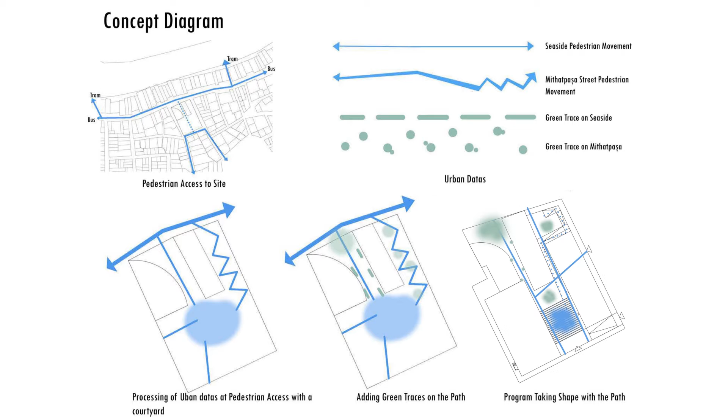Then I followed the green traces. I tried to apply them to sites with the main pedestrian axis and the side axis. First of all, I determined my pedestrian entrances and divided the functions into certain zones, according to the movement in the site.

I combined them with the green spaces. Then I added the program. Here exploded diagram, bubble diagram, and the matrix diagram are seen.

I tried to create a commercial axis on the Anadolu apartment side of the ground floor. Here I added functions such as cafe, restaurant, gift shop, etc. I left the middle part completely empty and tried to design shady semi-open spaces where people could spend time. The upper floor of this area can be reached by a ramp from Mithatpaşa Street.

I wanted this part to work like an axis and a backyard that will be in continuous use. I reserved the other side for my theater building and combined my two masses with this semi-open space. I integrate the semi-open space on the ground floor into the theater with the wall system that can be opened.

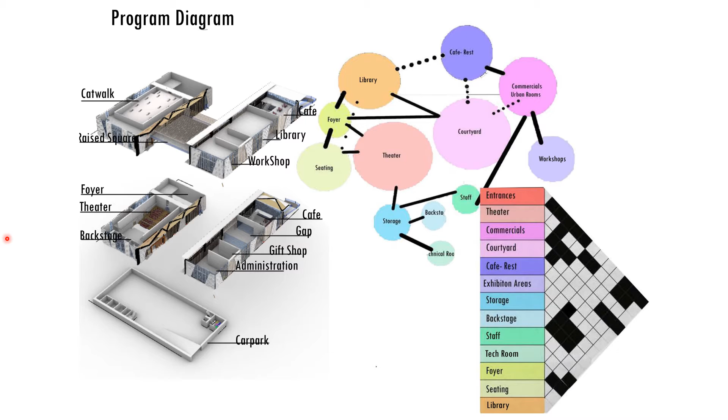The axis from the Goethe building and Anadolu apartment building is a linear axis. At the end of the side, a square is formed by green traces, and with these traces it reached the courtyard I mentioned before.

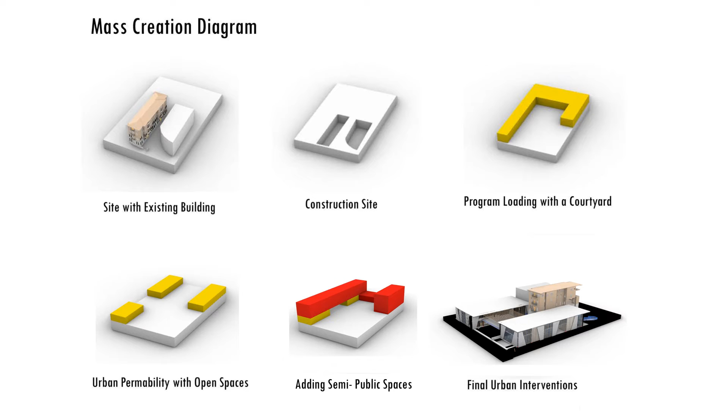Here is my mass diagram. We see the process of the program together with the urban spaces and the final state it has taken. Here too there are site plans and sections.

When we come to the ground floor plan, the theater position is like this. By entering the foyer from here, we can reach the +2 level with these stairs. And the seating areas at the 0 level, thanks to this hall.

Here the stage, and right after it's located the backstage. In the backstage there are staff rooms, a dressing room for men and women, and a storage.

The transformable part of the theater consists of accordion doors. Thanks to the accordion doors located next to the stage, the direction can be turned to the inner courtyard. In this way, outdoor activities can also be carried out. Its renders can be seen here.

In the other block, there is a cafe, restaurant, gift shop, and an administrative unit. Displays serve more daily use. The ramp in front of the cafe takes us to the plus 5 level.

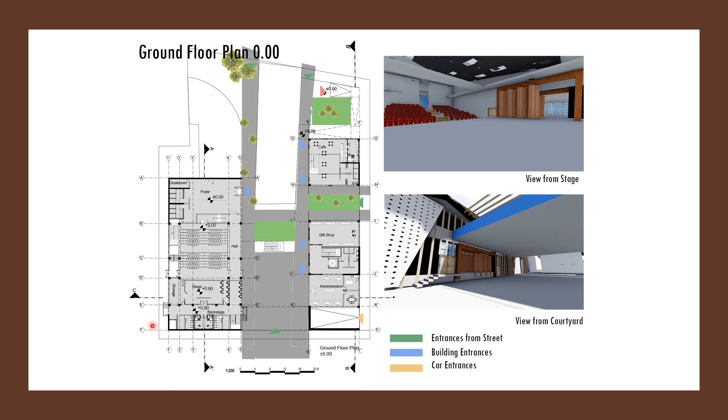Thanks to this platform, we have semi-open areas in the courtyard. Two main gaps allow people to gather in this courtyard, spend time here, and keep this place alive.

When we go to the next floor, we come across functions such as a technical room, a catwalk, a storage, a machine room in the theater section. On the other side, there are cafe, library, and workshop areas.

The platform coming from Mithatpaşa Street forms a raised square in the middle. Units at the plus 5 level can reach here directly. It is envisaged that various exhibitions will take place here, and that people will use it in daily life.

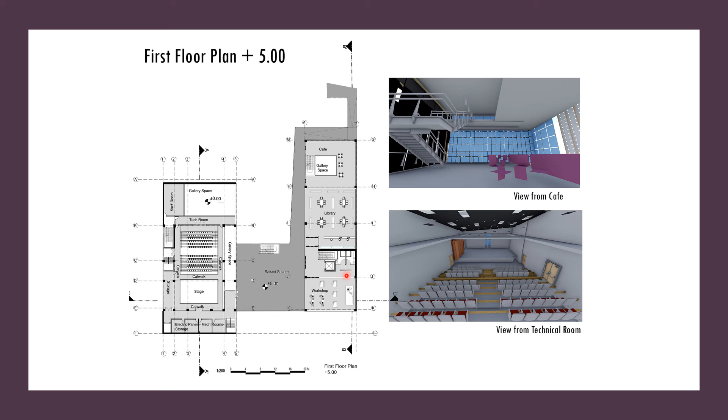The library and the workshop were created for the use of children in the surrounding schools. It tries to be a complex, not only for the theater audience, but mostly fed by its neighbors.

The basement floor is reserved for car parking. Here too functions such as mechanical room, storage, and electric panels are located.

These are sections. Section A passes through the middle of the theater. Here you can see the foyer, the seating areas, stage and backstage, and car park.

Section B passes through the other block. Here is the cafe, the library, the workshop areas. On the ground floor, the gift shop, the administration, and the basement. Here is the car park.

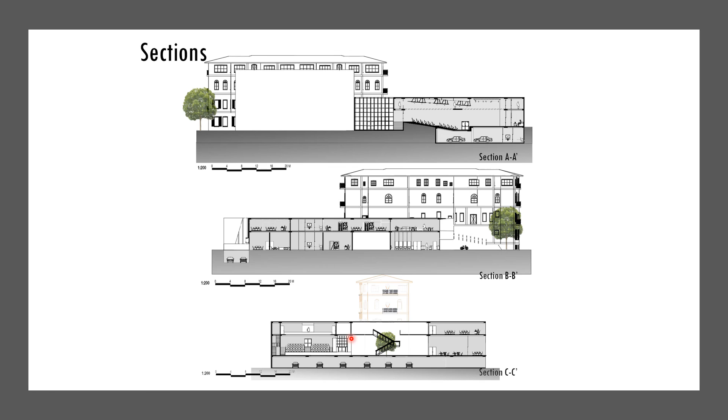Section C passes through the junction of the two. Here is the 1 to 100 scale section, and a perspective view of that section.

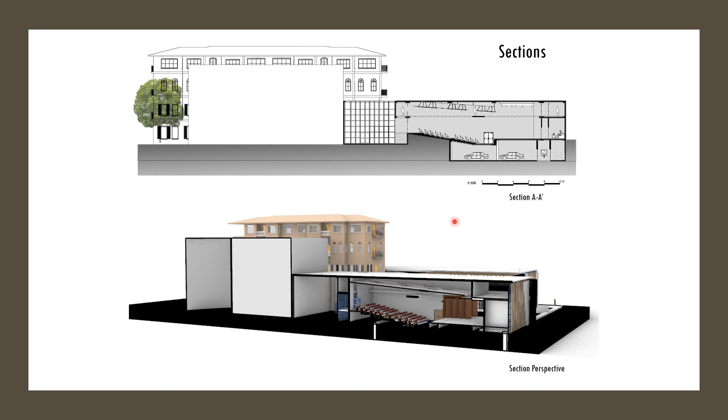In the elevations facing the courtyard, steel columns, wooden shadow elements, and glass facade welcome us. On the other side, glass facade, deep walls, wooden shadow elements, and composite panels are used.

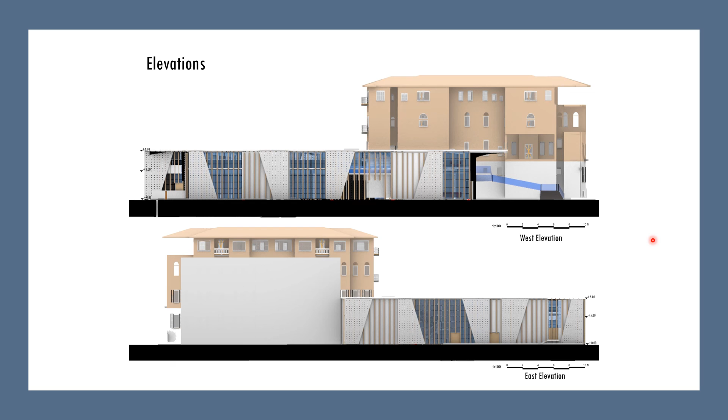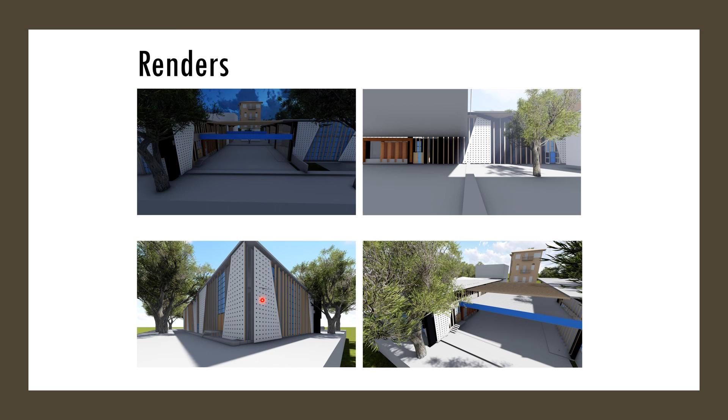This is the front of the theater. In this part, views from the ramp and the gap can be seen.